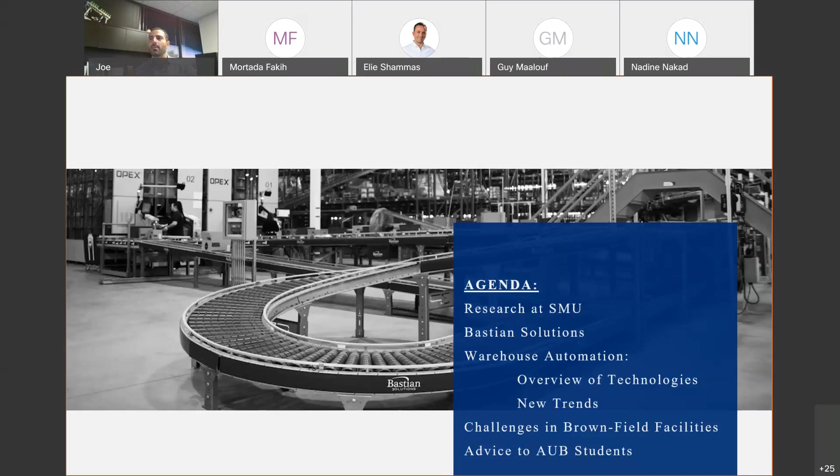All right, SMU. I went to SMU, I did research in robotics, and the motivation behind that research was to explore robotic locomotors that are not necessarily inspired by nature. This is a family tree of dynamical systems that can represent a general scheme for locomotion.

You start with a simple mass, then you add more masses and linkages and revolute joints, and you get different generations of dynamical systems. And it was shown that each generation inherits the locomotion gaits of its previous ancestors and creates its own new ones.

Out of these systems, you can identify here, let me put a laser pointer, a bipedal locomotor. This is how humans walk, they get a stable gait, and this is how they do the walking gait. But you also can see worm-like robots and systems. Really, the focus of my work was on investigating creating a system that can regenerate gaits, and for that first generation here is what I call a baton.

So let's talk a little bit about gait. Well, if you get a mass here with a surface, and you throw it at a certain velocity and initial condition, it'll bounce and eventually die out. But if you put it on a decline, or if you give it a little more energy at every impact and compensate for the losses there, it will get to a stable gait, and that would be a bouncing gait.

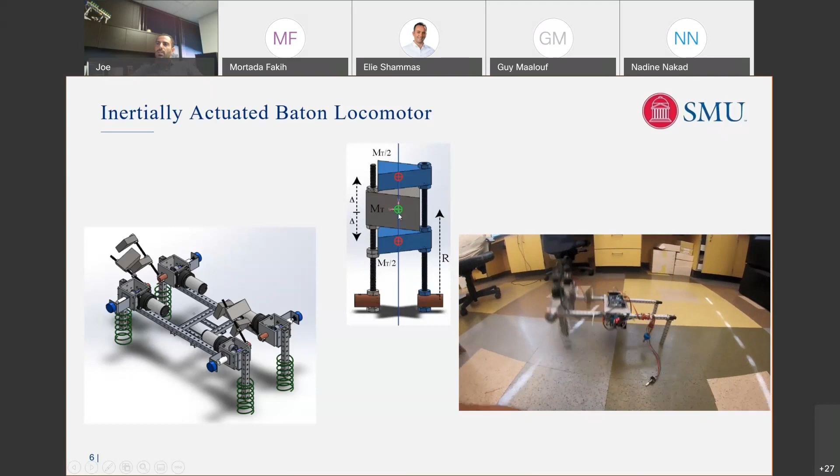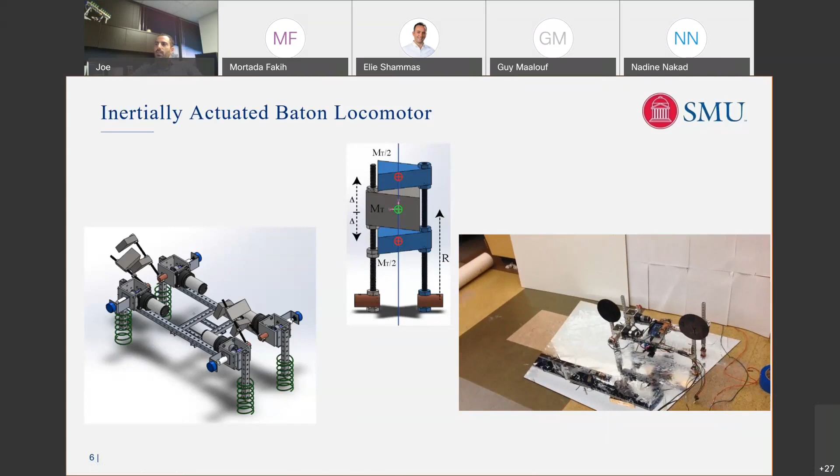And here you see masses. The way we did these, I did these masses, you've got to have a balanced system. So with these triangular masses, I was able to put the center of mass in the sagittal plane of the robot and keep it stable. This is an onboard video. This is bringing back a lot of good memories, but these robots are not even close to what we do right now.

I'll show a couple more gaits here. This is a galloping gait where you have actuation on both sides of the baton, and you can see here in slow motion on the robot. And changing some other parameters, such as the rendezvous angle, you get a hopping gait.

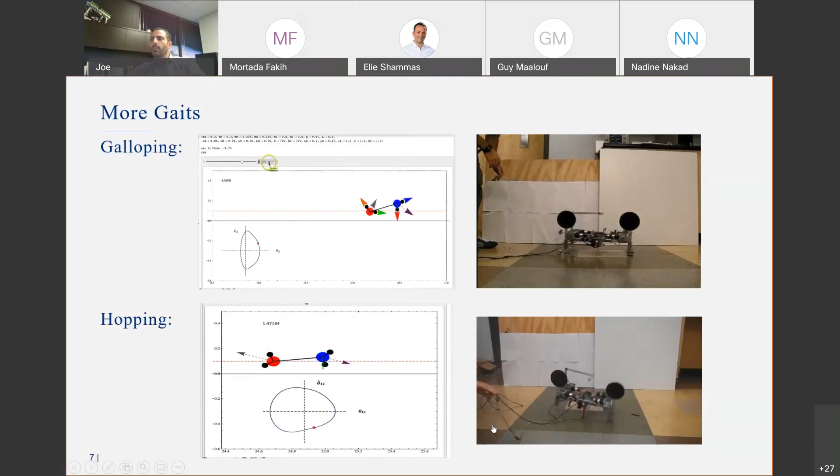Very cool work, very close to what I do here in motion planning also. And I'm glad to see that you used to use Mathematica back there. Yeah, okay, very cool. Are you guys using it?

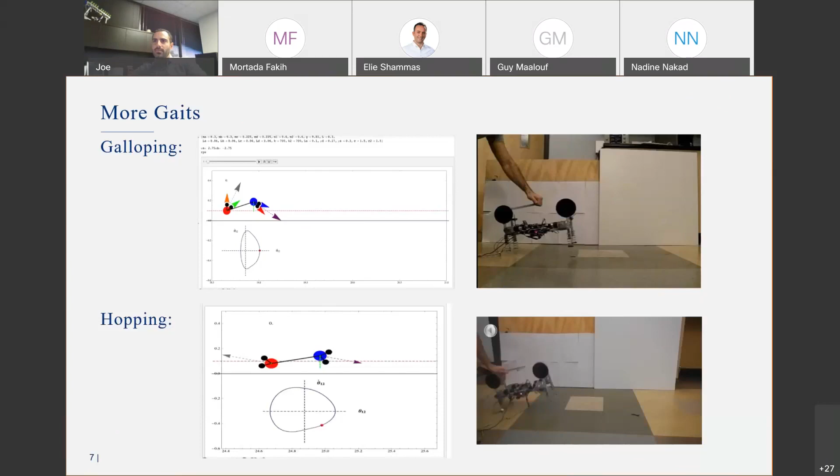Yeah, maybe a quick question, Joe. So I see in your phase plots, it was theta versus theta dot, or maybe I missed something over there. Sorry, can you say that again? In your phase plots, if you go back one slide. Yes. One more, theta dot.

Well, to explain, theta 1, 2 and theta dot 1, 2, that's the angle of the baton with respect to ground. It really shows you, for example, on these larger phase plots, that you're on a limit cycle with a certain level of theta dot. And it tells you if you're tapping or dragging in the case of the smaller ones. You look at bifurcations, coexisting limit cycles, etc.

But really, these phase plots don't give you necessarily a velocity profile of the gait, and this plot here shows it. You've got the average velocity of the baton with respect to the rendezvous angle beta, and you see how it moves forward in certain scenarios. It goes negative in the negative direction, and it can be going negative direction and also tapping forward—so dragging backward and tapping forward.

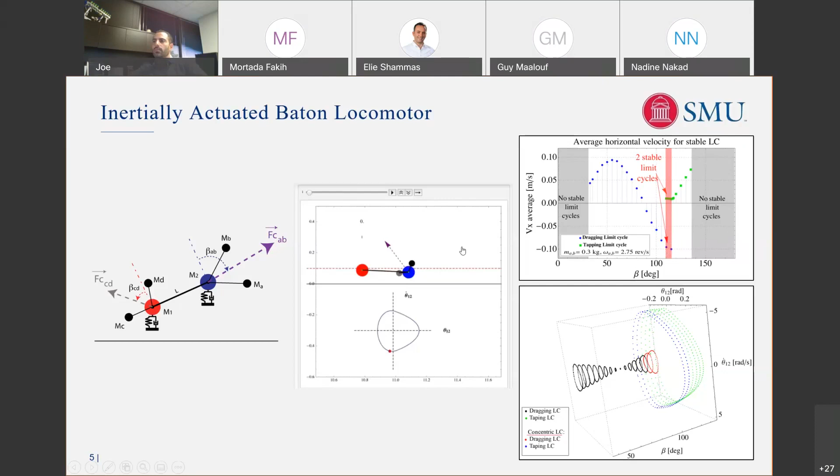Alright, let's talk about Bastian Solutions. We are a system integrator. We work in the warehouse automation industry for the material handling businesses. We've got over 900 employees, closer to 1,000, and half of which are engineers.

We work with a large amount of suppliers, we partner up with them, and we've got a big customer base in the US and internationally with Fortune 10, Fortune 100, Fortune 500 companies. We are number 15 worldwide in material handling system suppliers, and number 3 in the US.

We've got offices around the country here in the US, and a national presence. I'm part of the mobile robotics office in Dallas, Texas, where we develop mobile platforms, mobile robotics, R&D projects, all of that.

About 3 years ago, a little less than that, we got acquired by Toyota, the Toyota industrial side of the business, not the motor side. Motor side is like a relative in the family. We have basically solutions for every challenge in the warehouse automation and material handling industry, and we've got presence everywhere.

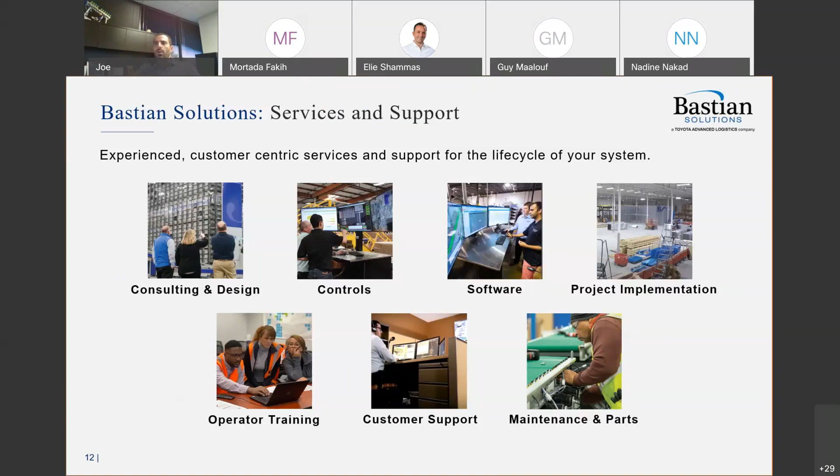We do project implementation from A to Z. So we can buy equipment, design and manufacture equipment, install it at customer sites, commission it and get it going. Then we do training for the operators, customer support 24/7, and of course maintenance and parts.

Now, here is a brief overview of the applied technologies that we can integrate. We are a system integrator, so we find the best solution for the customer, the best of breed for every unique solution. So if we're installing a piece of conveyor, we have our own conveyors, but we also partner up with suppliers of different conveyors depending on the customer's application and needs, and we would recommend the right fit for them.

I'll be going into more details on the technologies I've highlighted here, but we do everything from picking technologies, ASRS which is automated storage retrieval systems, goods-to-person technologies, retail and e-commerce, AGVs which are automated guided vehicles that navigate in warehouses. We do a lot of robotics, different applications which I'll briefly highlight later, and goods-to-robot, I'll get to that later. I want to bring up that we do a lot of custom automation—really one-off projects, one-off automation systems, material handling systems. We've got a group focused on that, a very smart group of engineers. And obviously we do conveyors, sortation systems, racks and shelving as well, but I'm not talking about them today.

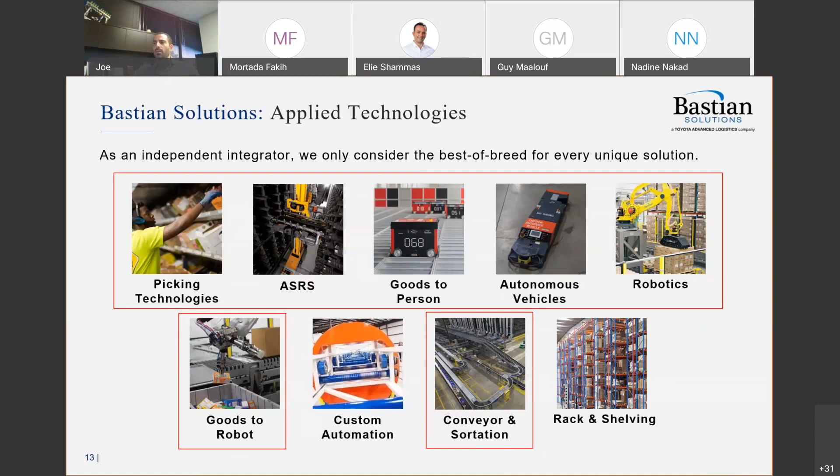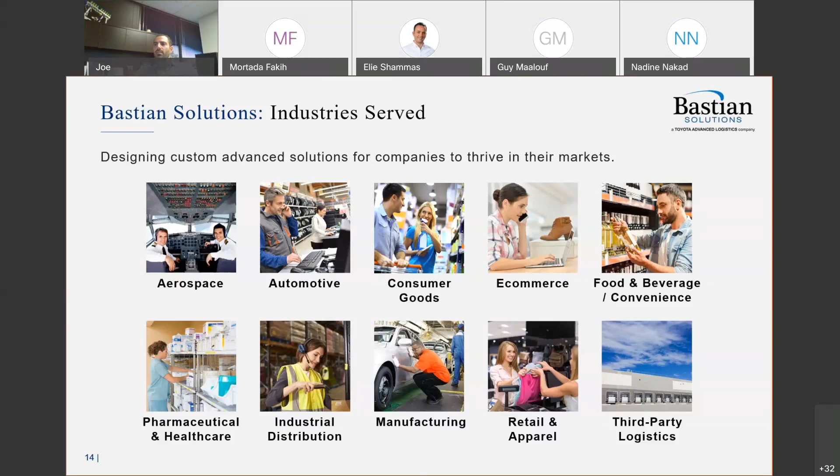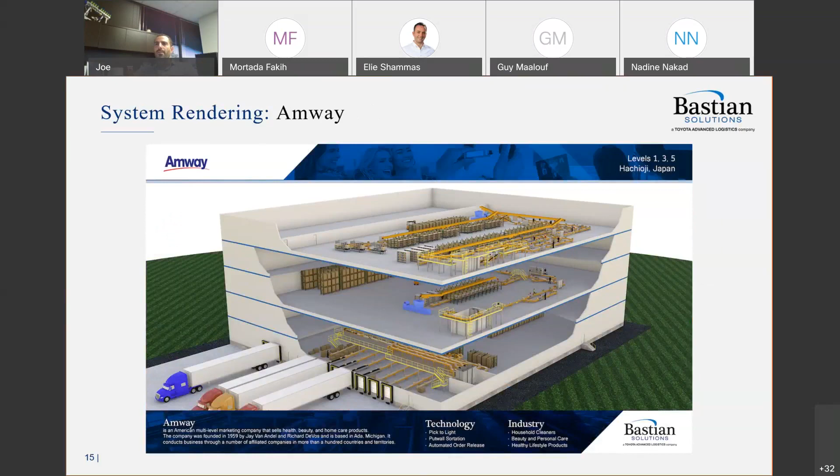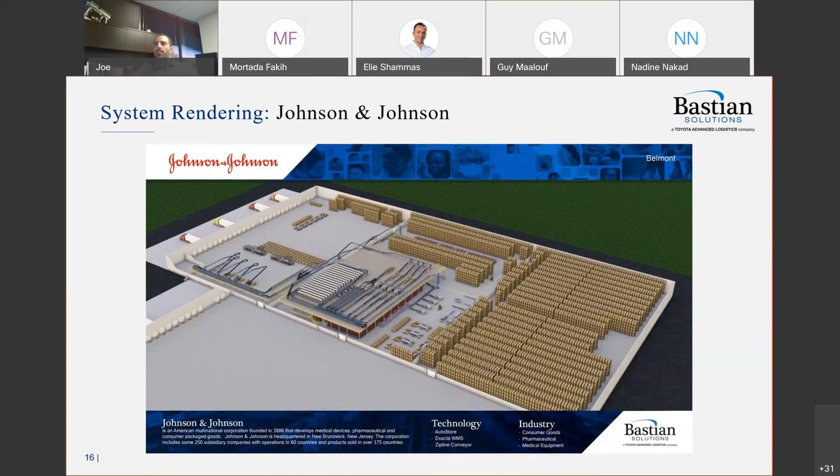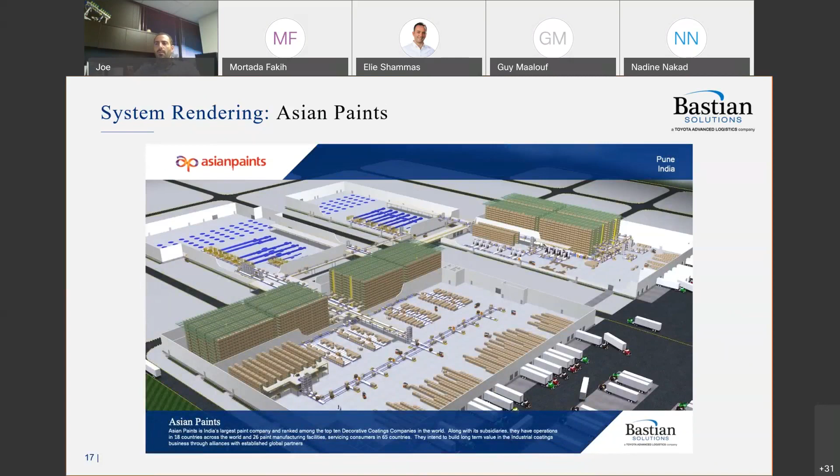I'm going to show briefly a couple of these renderings of projects we've implemented at different customer sites. I think this is Amway in Japan. This is Johnson & Johnson, which has been very well in the news recently since they're working on COVID-19 vaccines. And this is Asian Paints, one of the largest paint companies in India. That gives you a scale of what we do.

All right, let's dive into warehouse automation technologies. But before I do that, let's see why we would use automation.

Well, first, obviously, you want to bring the cost down. There are different ways you can optimize for cost with automation, but really the major challenge is labor. The labor force is declining and wages are increasing.

In general, the jobs you're trying to fill for warehouses are high turnover jobs. People don't last in them for long, maybe a few months, a year at most, and then they quit. So it's a very challenging HR problem for companies to keep people, especially with seasonal demands. Around Christmas time or other holidays, some companies need to hire a lot more people to keep up with demand, but then they have to let them go. So that's a challenge, and automation is a solution to that.

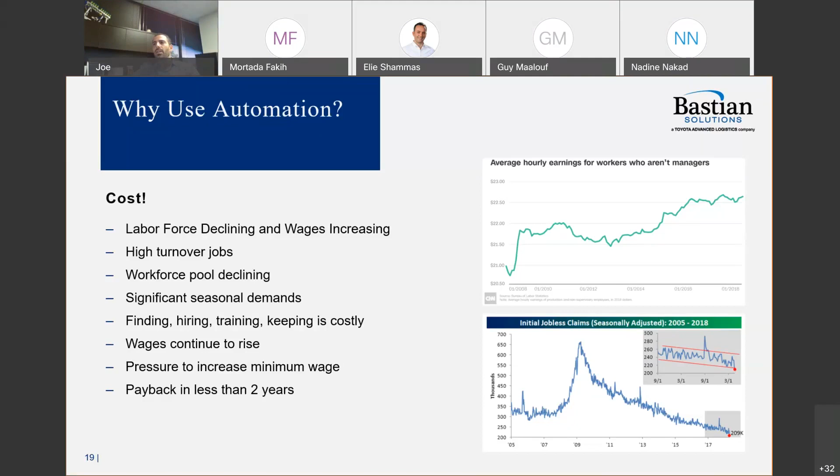And obviously, wages are increasing and continue to rise. A lot of times when you employ technologies and automation, people look for one to two years of payback, so a high ROI, so they can recapture their money and save on cost.

You also have danger around warehouses. Forklifts, for example, are the number one cause of death in a warehouse. So a lot of people are looking to automate forklifts in warehouses to prevent that.

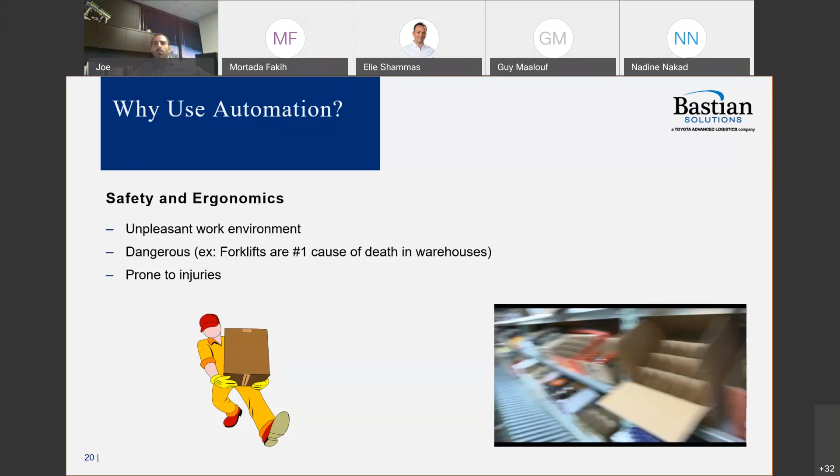Now, when you use robots, you improve productivity. Obviously you can scale - increase the number of robots, increase certain areas, repurpose it. It's very modular in general for shifting markets. So if you have AGVs, you can later add to the system. A couple of years down the road, if your production is increasing, you can add more robots, for example.

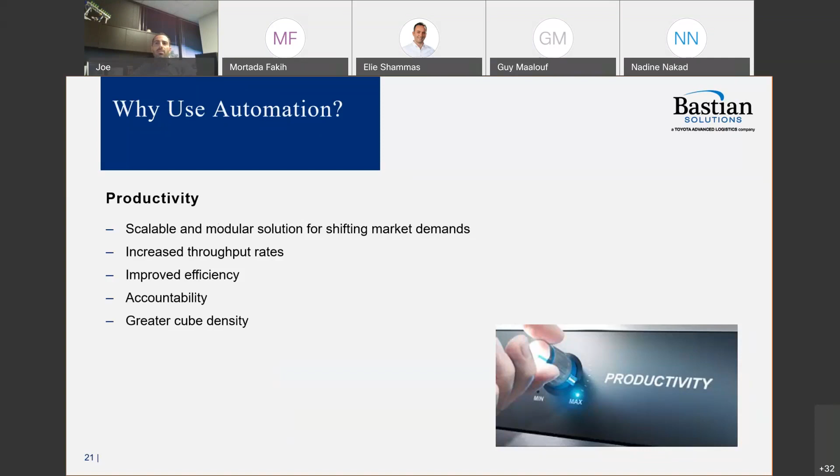You can have an increase in throughput rates, obviously improved efficiency, and you don't have mistakes in orders. Also accountability - in Lebanon, when I go and visit, I keep hearing about somebody going bankrupt because such and such stole from them, from the warehouse, this and that. If you have automation and the right systems, you can keep track of everything. And of course, you can leverage space much better - you can get a greater cube density if you go vertical, which I'll touch on later.

One of the disruptive technologies that affected our world is the Amazon effect, with same day, next day shipping. All that put a lot of stress on other companies to survive. They needed to add automation.

Finally, let me move on and talk a little bit about social distancing. As you all know, we all had to go work from home, but we still want to eat, we still want medication, we still want everything delivered to us. And how do you do that? Well, some of these companies are having to rely more and more on automation.

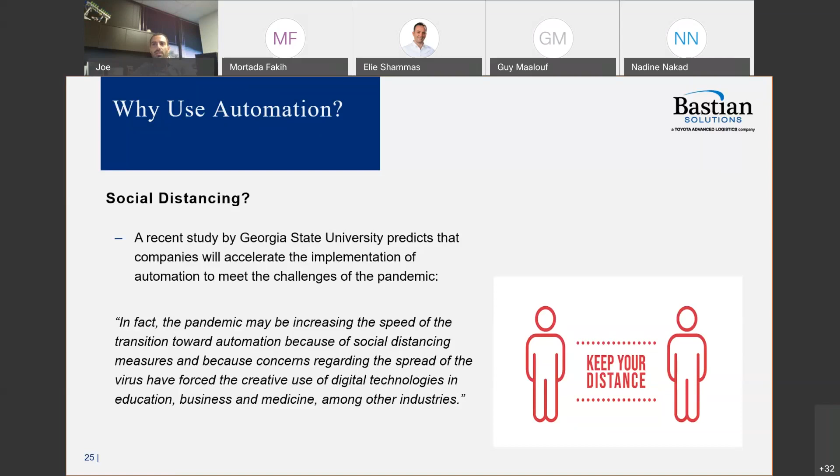I was looking at an article before this presentation by Georgia State University that predicts companies will accelerate the implementation of automation to meet the challenges of the pandemic. And we know that firsthand from our customers as well.

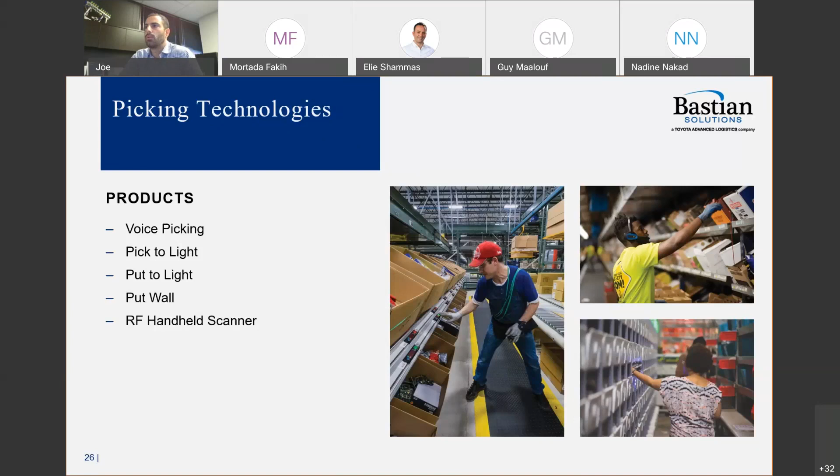All right, let's move on to picking technologies. This is where we start talking about the technologies and overview of warehouse automation, but this is a standard way to fill orders - voice picking or pick-to-light systems. You've got associates picking items from different shelves, filling orders, running around the warehouse. This is not automation, but it gives us a good idea of how things operate.

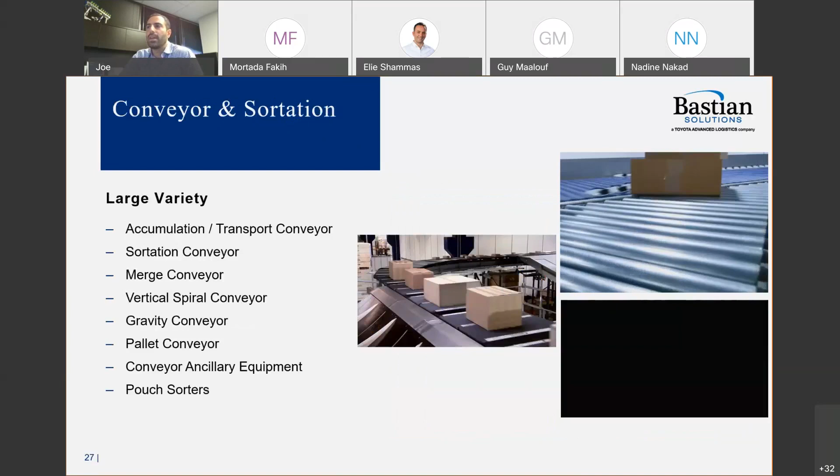Some of the conventional automation systems are conveyors and sortation systems, and you see them here. These are some of the products we offer.

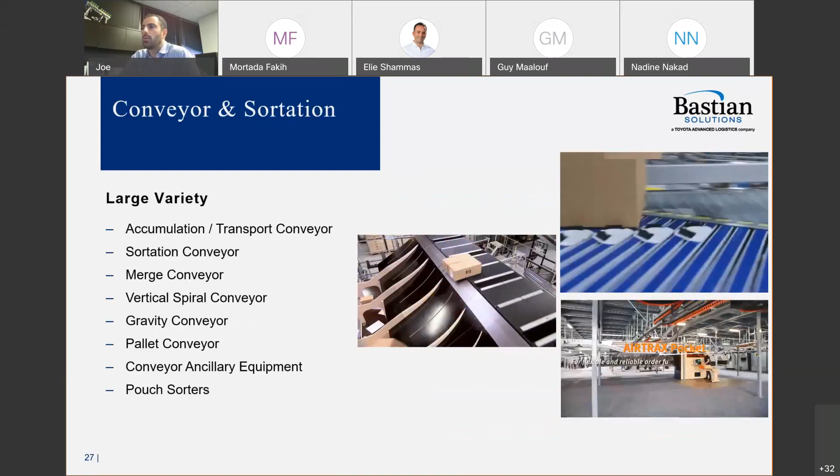Vanderlande, which is our counterpart in Europe, same family within Toyota. This is one of their recent offerings. It's a pouch system where you can store items, and it goes into vertical space to store them.

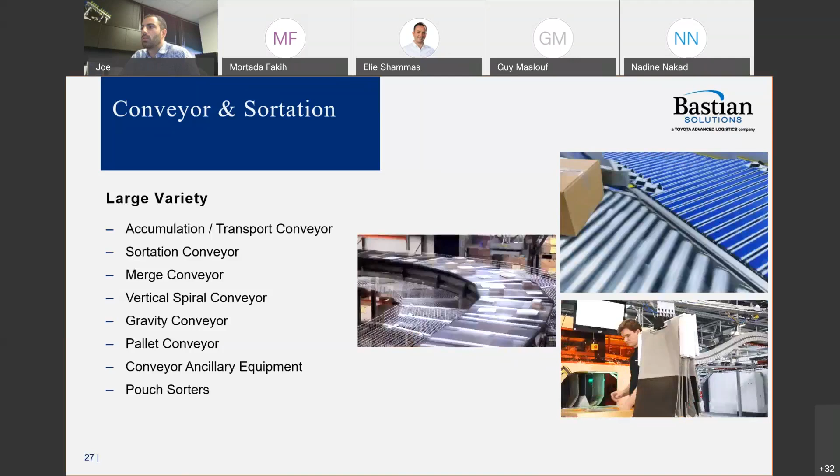Next up, I'll talk about ASRS, automated storage and retrieval systems. I'm sure you've seen something similar, like vertical car parking. These are very similar. I remember the first time I saw one in a warehouse, I spent three to four hours just watching it run - that's amazing. You've got a crane that goes up about 40 meters in the air, picking up pallets that are a couple tons in weight. These are great for storing pallets in a warehouse or distribution center, especially for refrigerated or freezer applications.

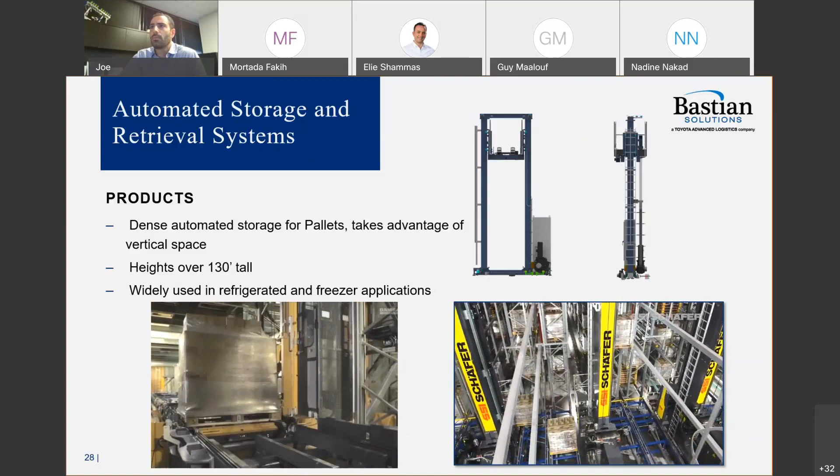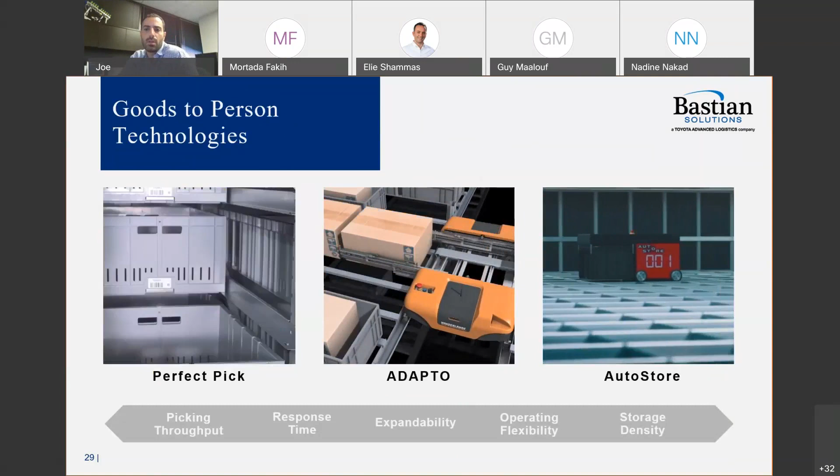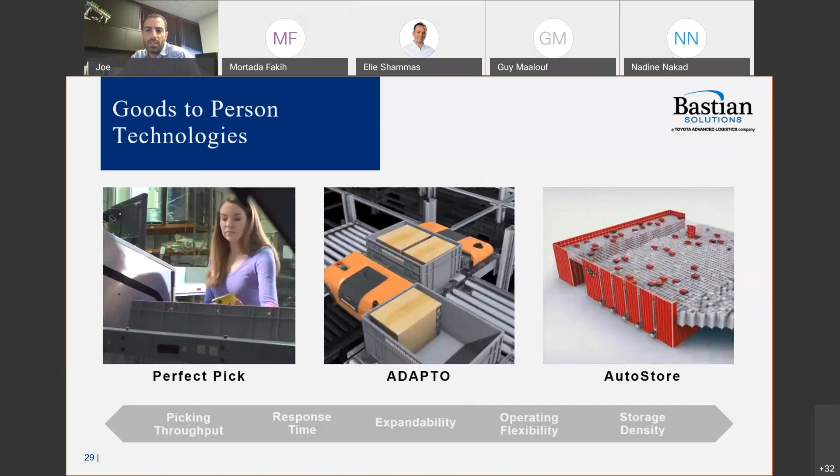Another type of storage system is goods-to-person shuttle systems. It's a modern method for order fulfillment, where the product is moved directly to the operator, who can pick what is needed to fill the order, allowing for an increase in efficiency and accuracy of the picking process. It is ideal for ergonomic picking, easily scalable, and offers a dense storage footprint.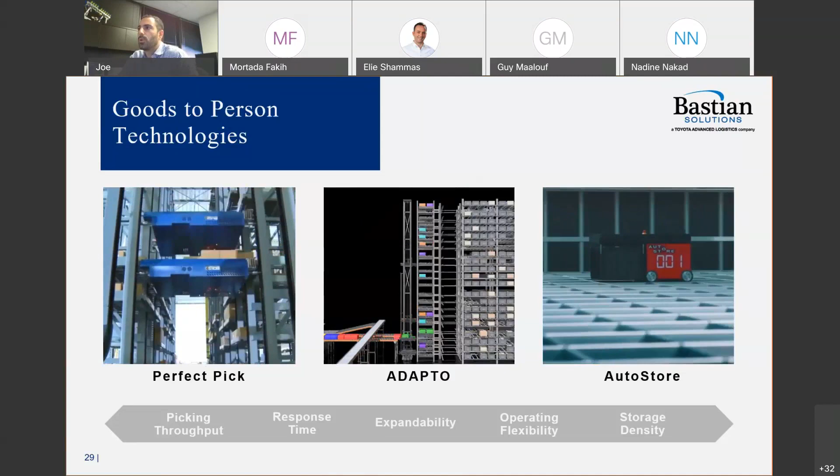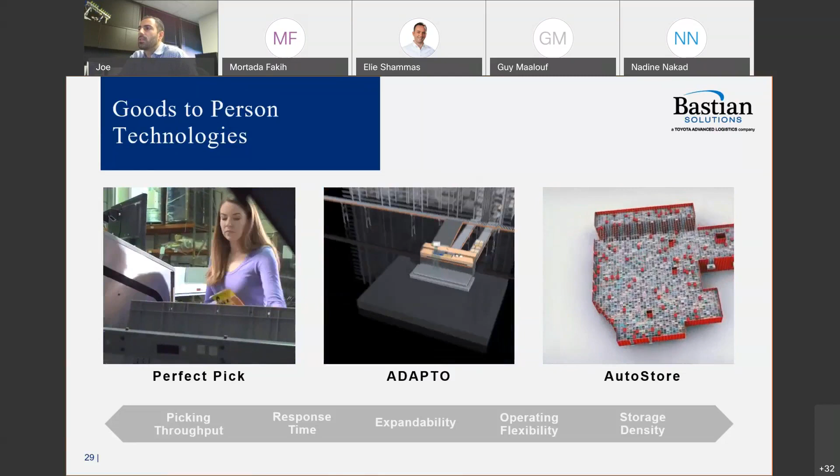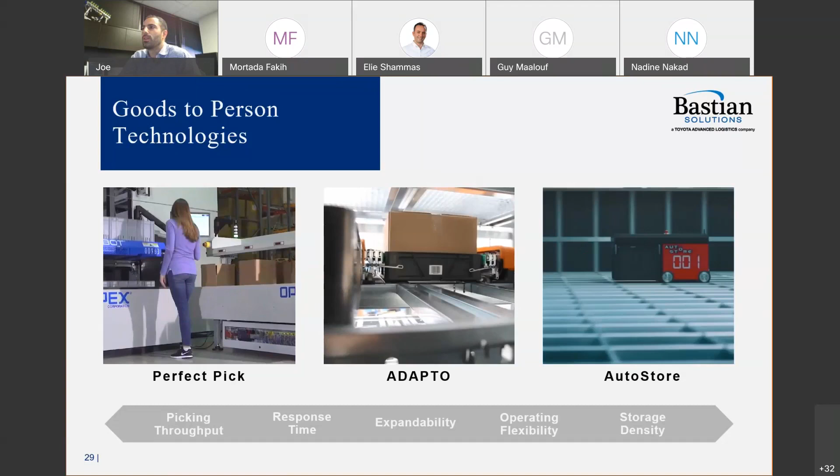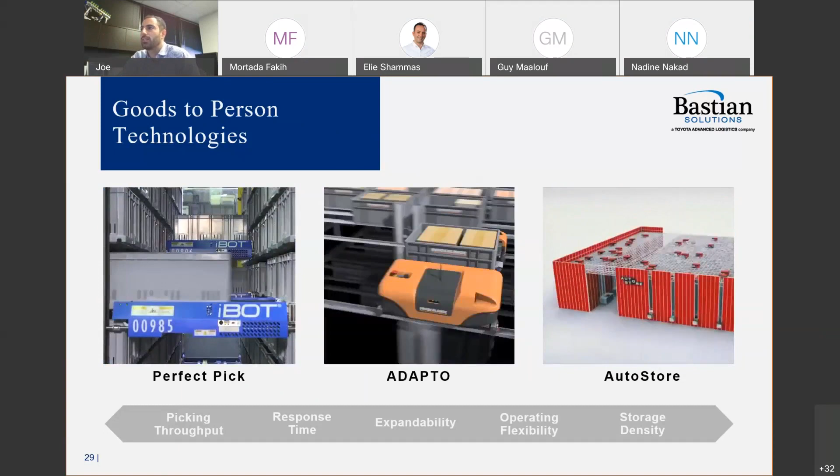The one on the right is the AutoStore. I'm going to show you a rendering at Puma in a bit of how this system is operating, but it's pretty neat. You get the high velocity or high frequency items stored on the top layers of that grid, and the low velocity ones on the bottom. So if it's a retail customer, in summertime they've got certain t-shirts on the top side, and later in wintertime, you get the jackets and heavier clothing on top.

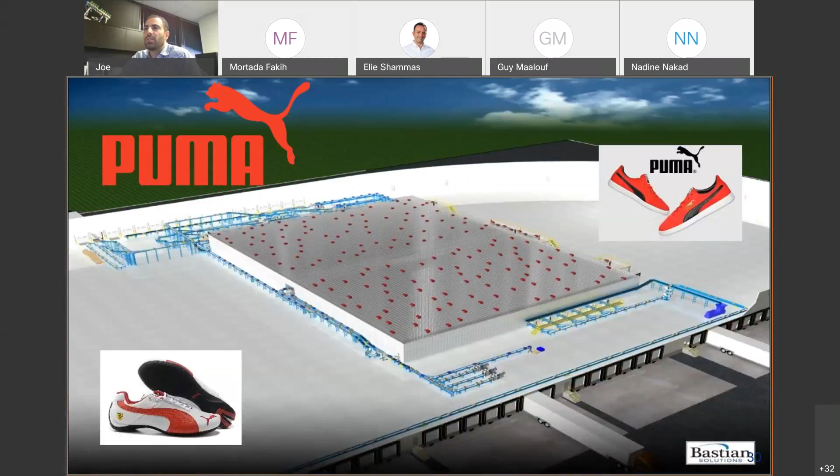So that's a Puma rendering, one of our customers, where we've integrated this AutoStore technology.

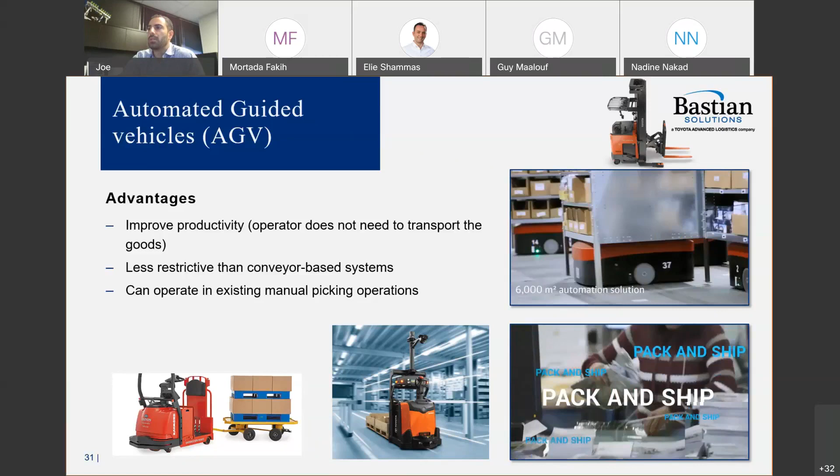Next, we move up to AGVs, automated guided vehicles. There are many different types in warehouses currently. Some of them are tuggers, so they pull carts. Some of them pick up pallets and move around. And there are different types too, where they pick up shelves, like the Amazon Kiva - it picks up a shelf and takes it to an operator where they pick items from the shelves and fill the order. The last one, bottom right, is a mobile platform that follows the operator so they don't have to carry bins around the warehouse.

Sorry, Nabil, I don't know why you want to annotate. Please let me know if you have any questions. No, thank you, that was a mistake. No problem, I figured.

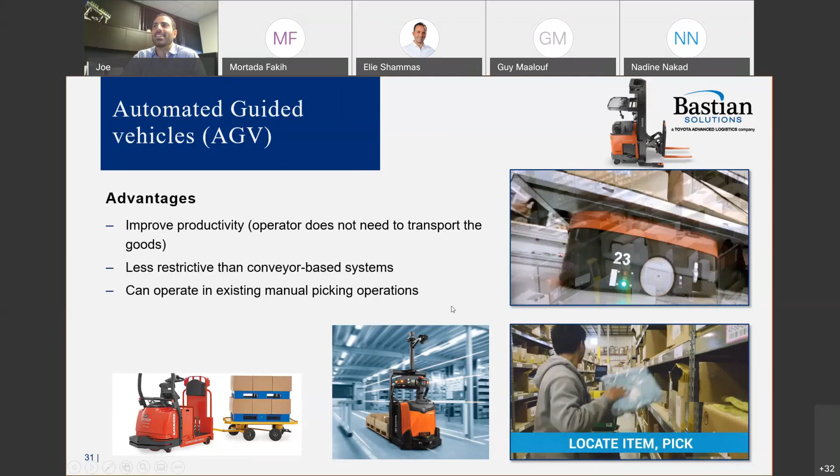All right, there's a wide use of robotics in the warehouse industry. It really is getting more and more advanced with the development of new types of end-of-arm tools that are very intricate, able to pick different items of different shapes. Also, due to sensing technologies, lasers, camera vision and all that, this is enabling this type of application and system in the warehouse.

All right, so these were the basic commodities and general technologies used in the warehouse automation industry. I'm going to talk now about new trends and emerging technologies - those being developed or used.

First one is goods-to-robot technologies. So we looked at each-picking and pick-to-light systems, where the person goes to the goods to pick the items. We also looked at a goods-to-person shuttle system, where it brings the tray to the operator to pick the items. But what if you were to have a robot there?

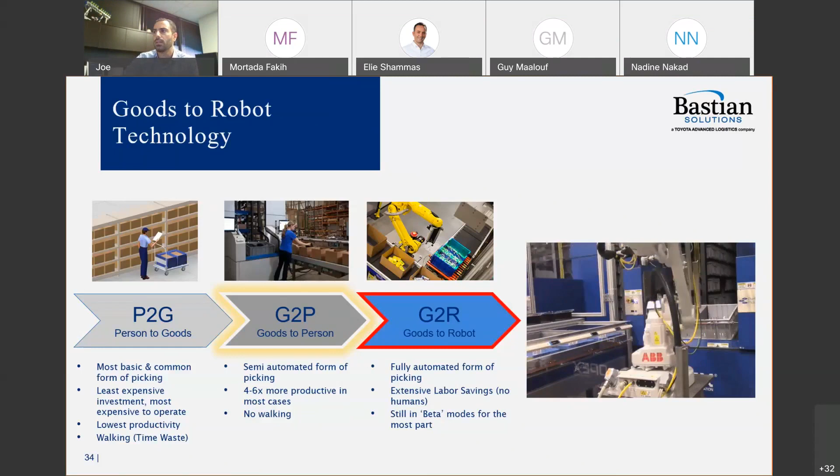And this is where you bring the goods to the robot and get it picking, which will save in labor costs. But these systems are still mostly in beta phases. They're not widely available because of the variety of items they need to pick. It's massive, thousands and thousands of stock keeping units that automation is not there yet, so it's all work in progress.

Another type of technology is the robot-to-goods technology, and this is where myself and my team are involved. This is where you get the robot to go to shelves or to the product to fill the orders. That's another way to improve productivity.

It is less restrictive than conveyor-based systems because you can definitely scale it, and you don't have to have conveyors that are always there. You can remove the conveyors and have these mobile platforms go everywhere in the warehouse. You can also put them in brownfield facilities or existing manual picking aisles, and I'll show you some videos later on.

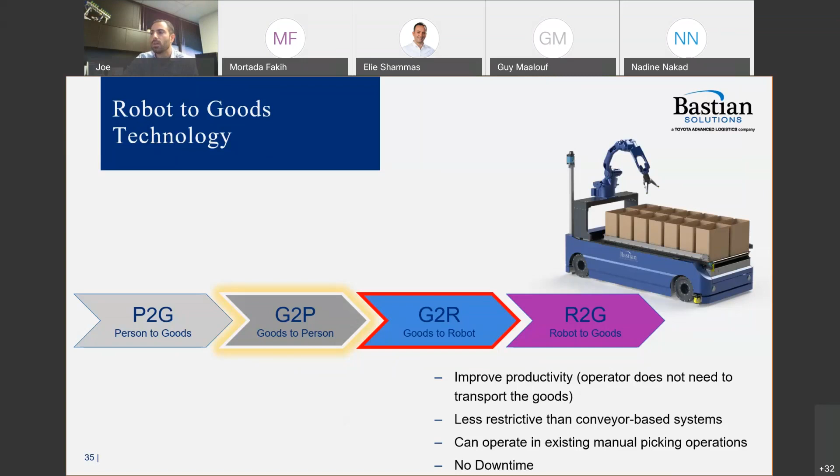So really what we've done at Bastian when I first joined is create a concept for each picking or batch picking. It's a mobile robot that drives in aisles and picks items from shelves and fills the orders on board the robot. We did simulations to figure out how many orders we can put in a robot, or should put in a robot. That depends, of course, on the customer, products, the customer's orders, the order profile, and the throughput rates. You can optimize for that.

Here you see the robot. It's got about 16 bins on board, and that means it's filling 16 orders at a time.

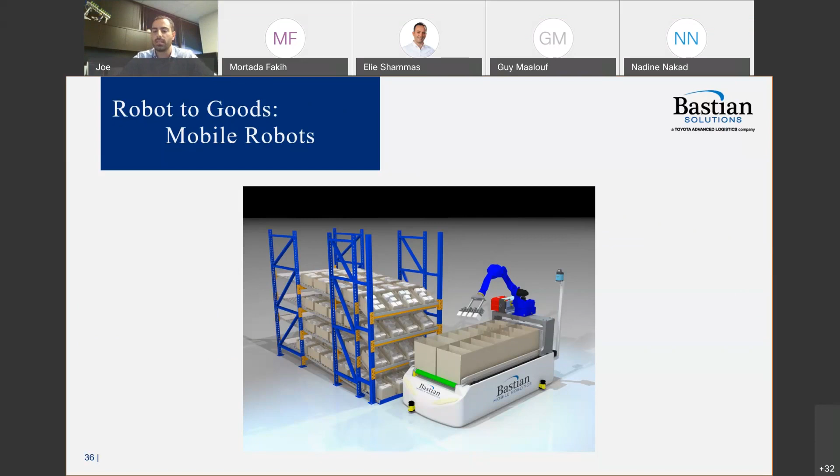Let me talk a little bit more about the technology we use on this mobile platform. First, you've got an industrial arm. It's an industrial 6-axis robot with a reconfigurable or custom end-of-arm tool to pick different items for different customers. It sits on a gantry, which is like a bridge that allows it to traverse along the length of the platform to reach into the totes or bins in the front.

It uses a mobile platform with omnidirectional, wheel-based movement. These are Mecanum wheels. I don't know if you guys are familiar with those, but you'll see the videos later on. We also use scanners and LiDAR for navigation purposes.

We also use opportunity charging. This is a way that we can allow the robot to operate 24/7. We employed wireless charging technique, inductive charging, similar to how you can charge your phone on a pad. But instead of charging batteries, we charge ultracapacitors. You can quickly charge those capacitors and rely on their high power density to provide power to the system. So when the robot is driving in an aisle, it can be charging. If it goes from one aisle to the other, it can rely on the capacitors to navigate.

One feature I'd like to talk about, and I hope you guys are familiar with it, is ROS Industrial, Robot Operating System. This is an open source platform for robotics. Are you guys using ROS? Anyone doing research or work with ROS?

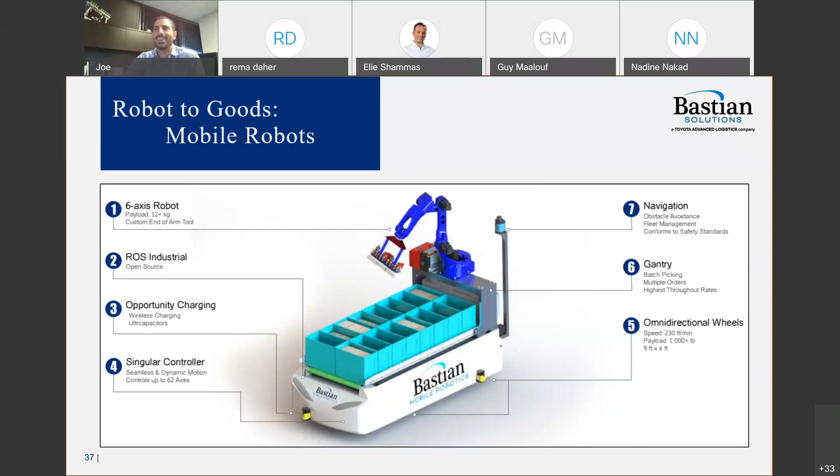All right, so what we do is also create simulations to figure out how many robots we need, how fast we need to drive the robots. This is how we design systems. We go back and forth between different iterations of the prototype and the simulation.

And here you see robots working together to fill orders. They're picking items from shelves and dropping them off at drop-off stations. When the bins are empty, we put the empty bins on a trash conveyor or a return conveyor. We put it far back in the simulation, but it's actually right on top of the robot.

We launched the concept at trade shows.

Question: in the simulation, is this a full physics simulation or just a logistical simulation? This one is a logistics simulation, not an emulation. We do emulation for navigation systems, when we navigate with the model of the robot, or if we create other things, we use Gazebo, for example, as a physics engine. But this is more of a logistics simulation. It's called FlexSim, and it's a very robust tool for different applications, but it's pretty neat for our supply chain and warehouse simulation.

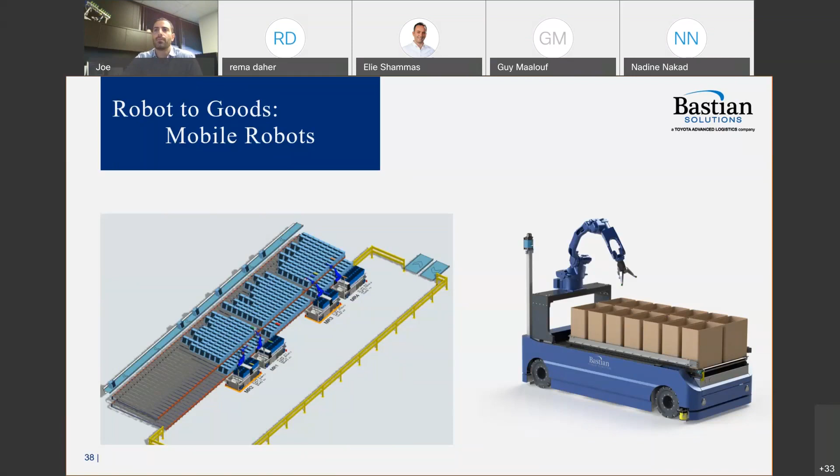Okay, thanks. So here we launched the robot. This is at ProMat 2017. We put a small setup—it's a demo setup, of course, made it easier for us to do a show, but obviously we've put these at customer sites, and they look a lot faster in real life and a lot meaner.

So here you see the robot can crab sideways. We put omnidirectional wheels so we can navigate tight aisles. And you can see also here replenishment.

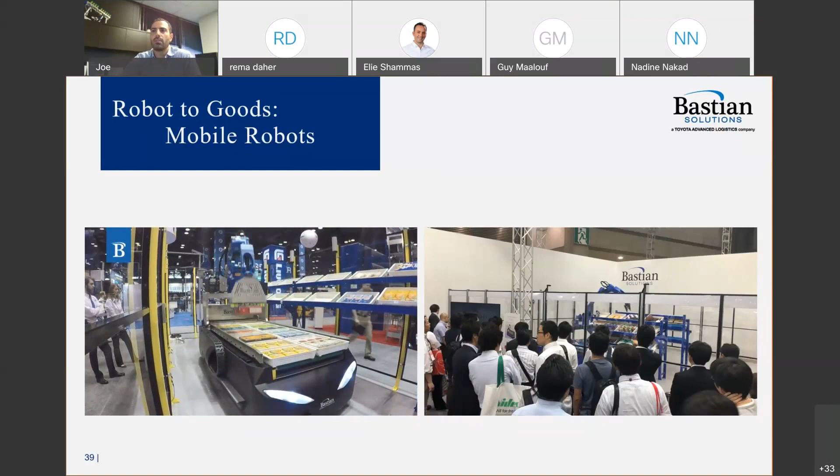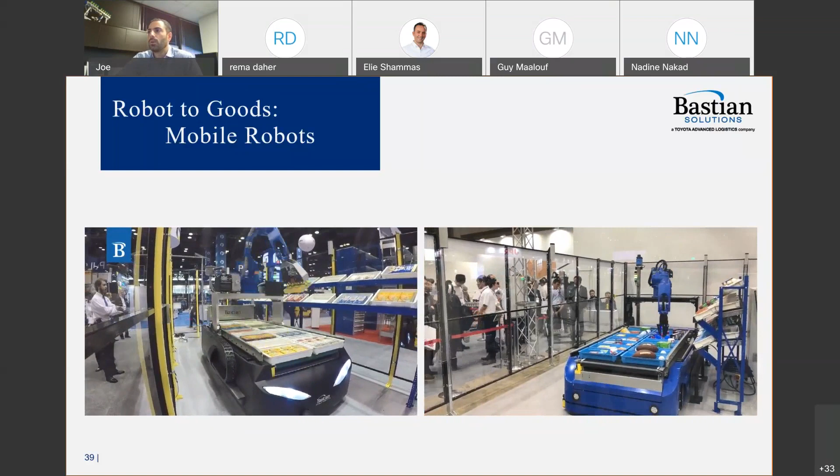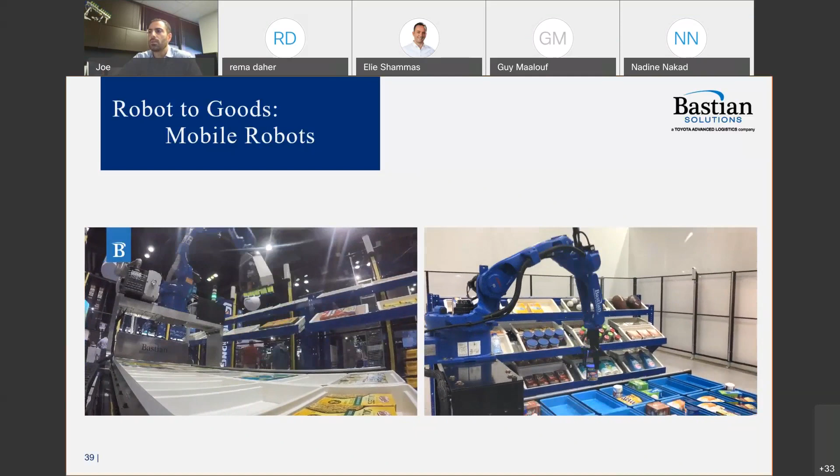We put another generation at another trade show. This is Logis-Tech in Tokyo. That was the second generation of the robot, and we put a special end effector tool that we've developed. It's a 3D printed end effector tool that's got 3 fingers. You can grasp with it, and you can also use vacuum cups on the tips to pick items. So depending on the item shape, you can pick it differently.

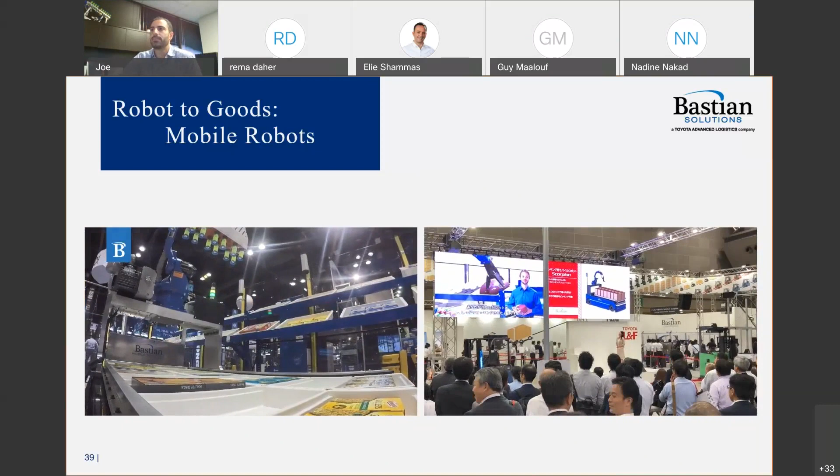Another type of robot to goods application is the Ultra robot that my team and I have been working on. This is a robot specific to applications where it's a very challenging environment for operators to work with, and that is the loading and unloading of trucks at the docks. Operators can be picking up items up to 50 pounds or 20 kilos and lifting them up high. It's very stressful for the shoulders, the back. It also is a very hot or very cold environment, so it's very unpleasant. A lot of people try to automate this process by putting a robotic arm in there.

But the problem with these robots is they're not designed to be in a confined space, so what they have to compromise with is speed. They have to slow down the robot to maneuver around singularity and obstacles. So what we did is we designed a platform—it's a mobile platform also, but it's really designed from the ground up for this application.

The concept is it's a mobile platform, a robotic conveyor, and it drives into the truck. In this case, it's unloading. It's got a telescoping conveyor attached to it that follows it into the truck, and it goes to where the product is and it picks it. It can also do loading as well.

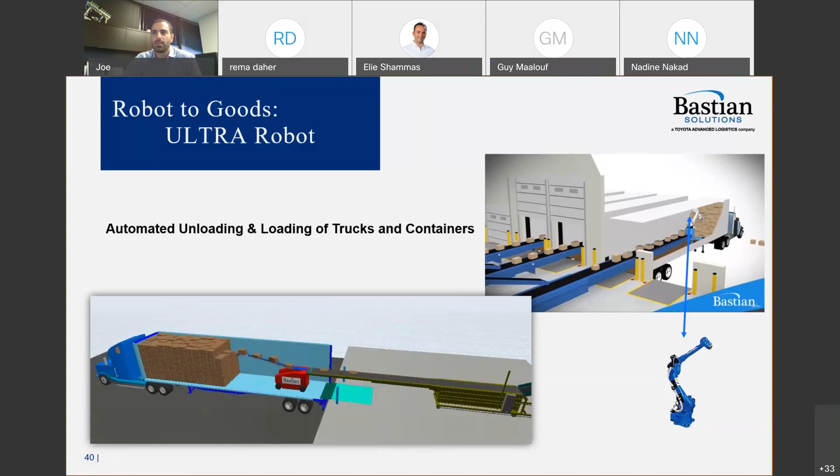So we did a simulation with FlexSim also to look at what type of speeds we need to design accordingly and meet the throughput rates that would be required to justify the cost of this technology. And we built prototypes—this is our beta prototype that we have put in the field. We've got several of these robots in customer sites.

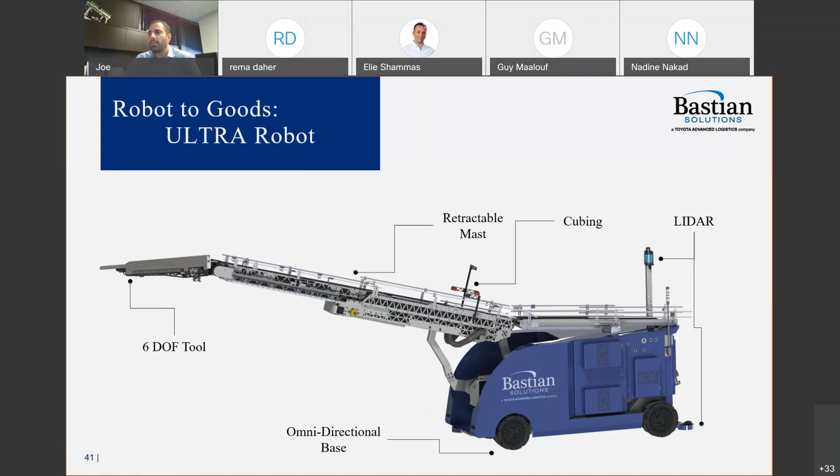It really is, again, a robotic conveyor. It's got an end effector tool with 6 degrees of freedom. It does have an omnidirectional wheelbase as well. We've got a retractable mast on board, so we can extend and retract, and we can park the robot if you've got confined space in the warehouse area. We also use cubing techniques to scan products in or out, as well as LiDAR and navigation to drive in and out of the trucks.

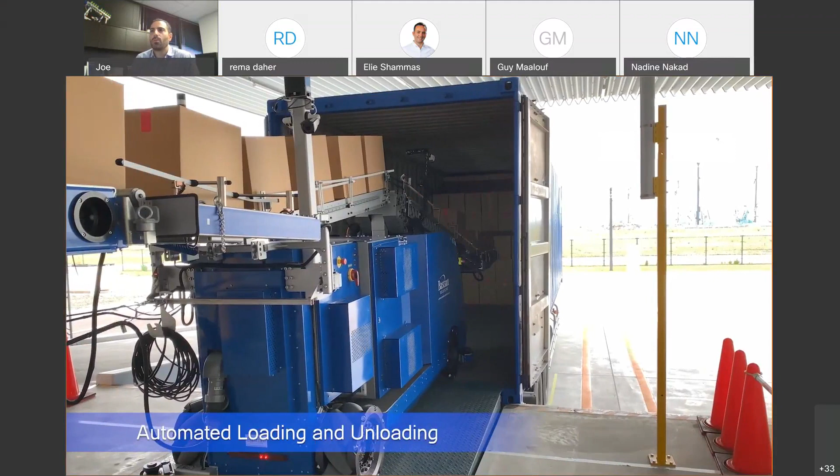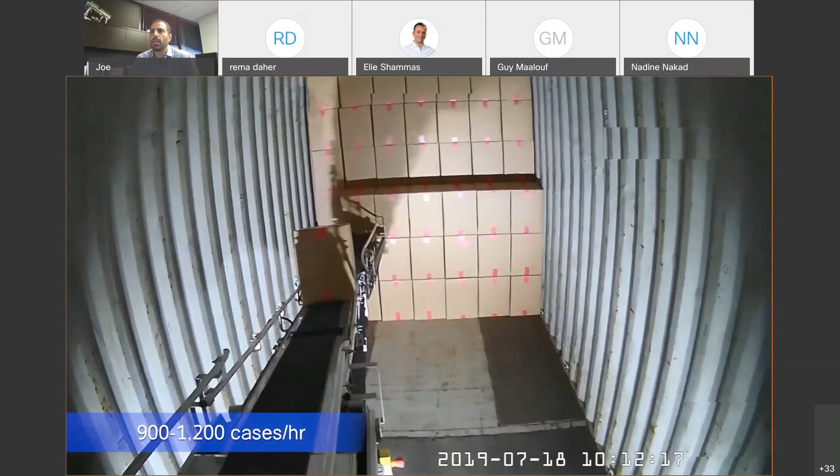I show a video here of one of our robots in the field. This is loading shipping containers. You see this from the back side, it's got the telescoping conveyor, and this is a loading application. The robot is loading in a serpentine fashion in rows of boxes, and we can load boxes in basically columns as well. What it does, you place boxes, you justify the box so you can clear up space at the end so you can squeeze another box in. And here you see it driving back on a dock leveler.

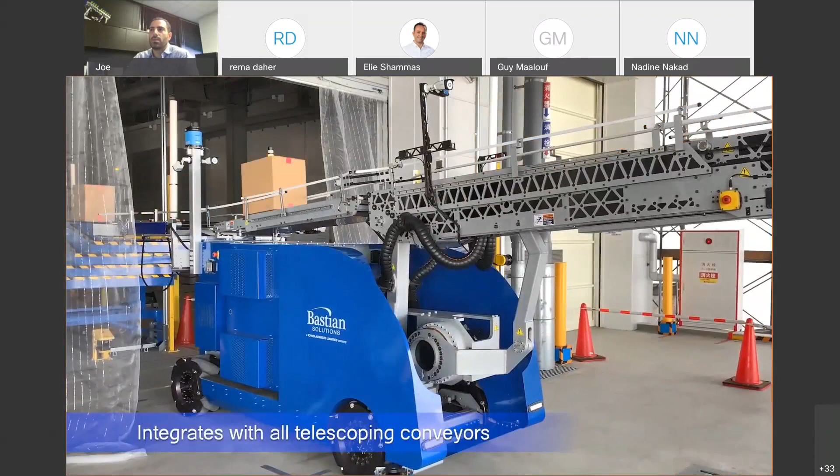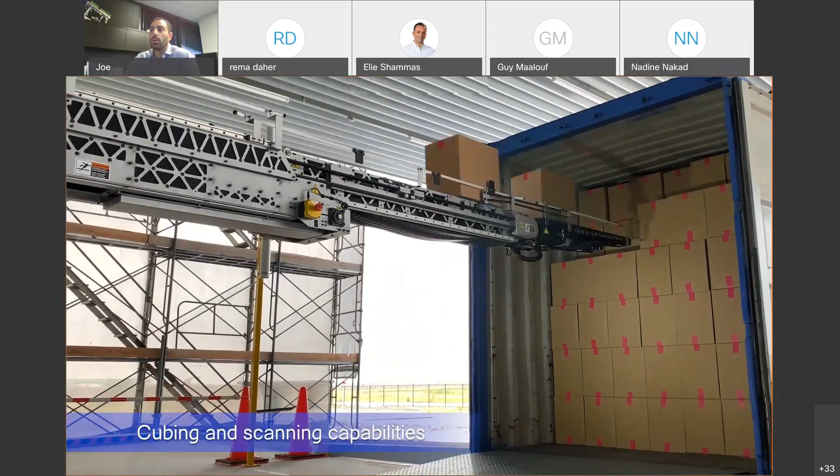More views. It's designed to handle boxes up to 50 pounds. Now, obviously, it does not do well if you have boxes of different sizes or if they vary quite a lot in size, but we are working on it—it's on our roadmap to solve. Right now, we focus on applications where the product is semi-uniform to some extent.

Oh, you can also do the reverse. This is a setup we did at a show where the robot is unloading boxes. It does loading and unloading, and here in this video it's unloading boxes. We've developed our own vision to do this work, employing convolutional neural networks and AI to detect boxes, along with conventional computer vision techniques.

So what we've created is a cost-effective solution for loading and unloading trucks. Customers get their money back in a couple of years. It's a very reliable system, and you can easily recover from faults. If you have a bad case or the robot is stuck somewhere, you can easily recover from that scenario.

You can reduce turnover by moving associates to more important areas of the operation. You still need to have a supervisor for these robots. If you've got multiple of these robots in a warehouse, you still have to have someone trained. So you take the associate that was loading the truck, train them on the robot, and have them supervise with minimal intervention. They do have to prep the trucks, make sure the robot is in the right location, and run them.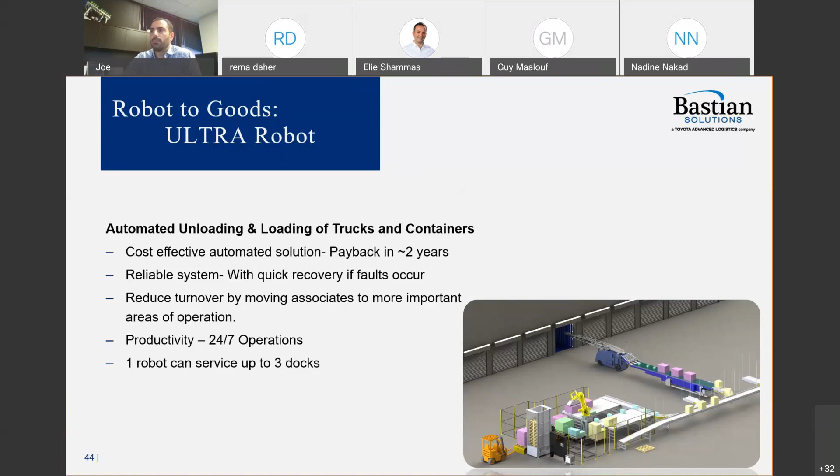I like to brag about the features of this robot because it was not easy to get there. Loading or unloading 1,200 cases per hour is not easy, and doing it at 99.8% reliability so you don't get many faults. Even if you get a fault, you can fix it in less than 3 minutes, with a mean time to repair. I like to brag about that. It's pretty impressive. I don't think anybody else in the world has been able to solve this. The attention we get every time we show this to customers or at trade shows, people love them.

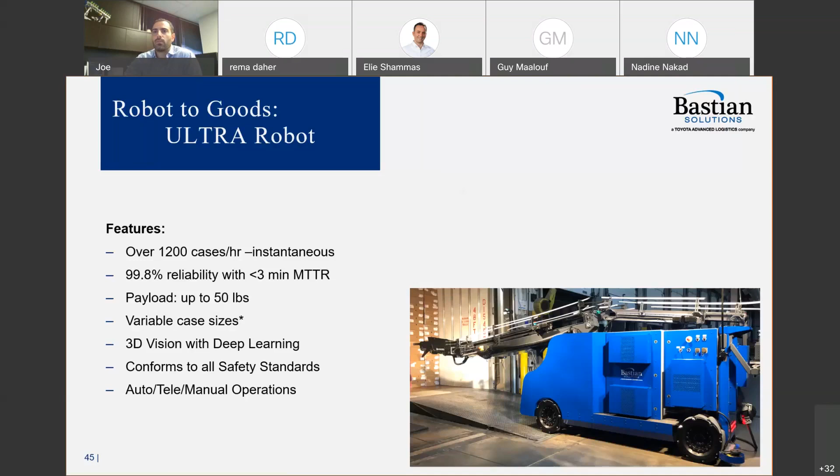One thing I would like to note here is we conform to all the safety standards in our industry.

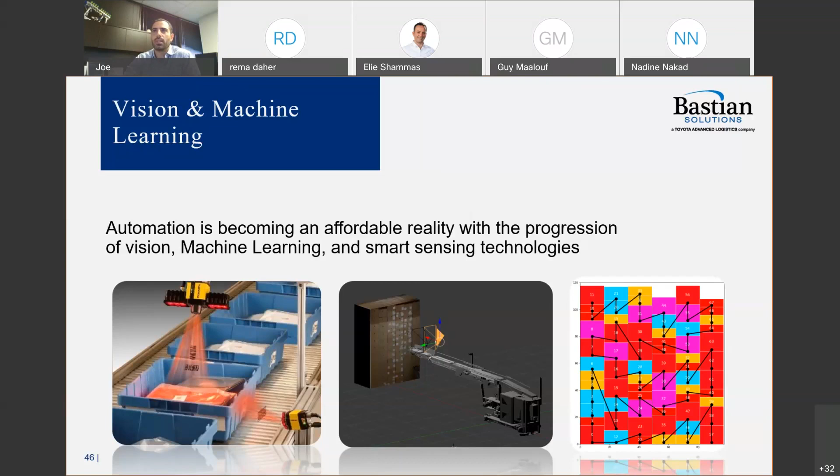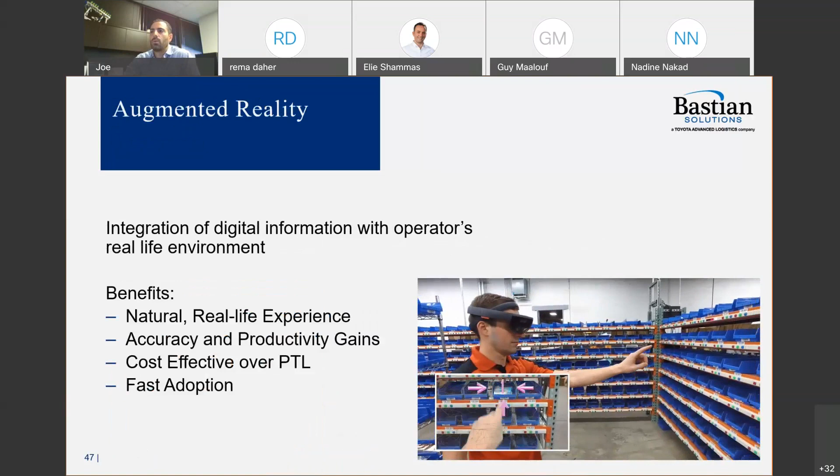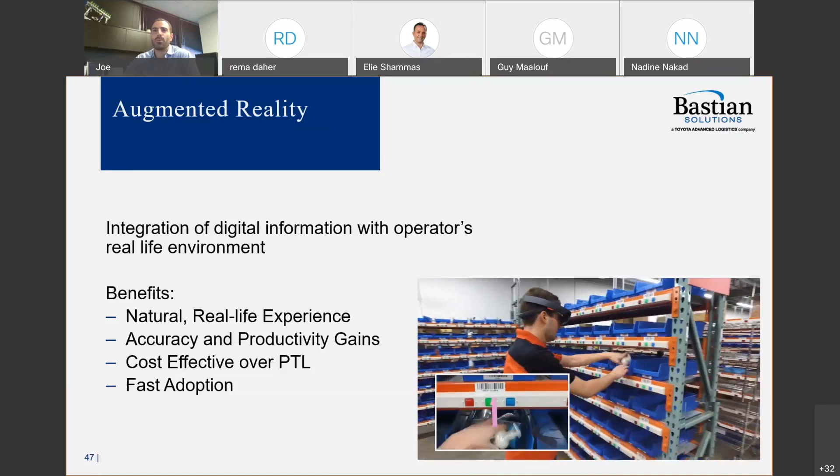I'm sure you've seen augmented reality. This is a HoloLens - we've got a software team that developed a way to do manual picking with that HoloLens. It points to where the shelves need to be picked from and how many items, and you can do an acknowledgement via voice or with a finger gesture. It's pretty, I've tried it. It's pretty cool and it's natural. You get used to it very quickly. It helps with accuracy and productivity, and you can get fast adoption as well.

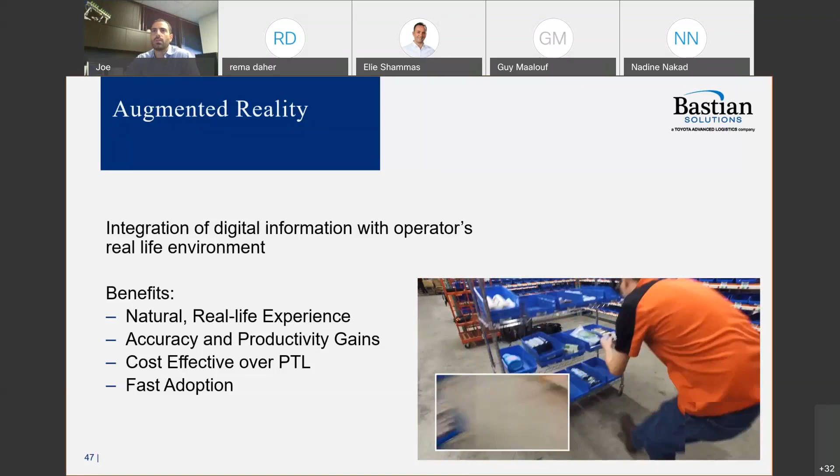A lot of AI is emerging right now in supply chain, whether it's for chatbots, operational procurement, or supply chain planning. You can forecast inventory through an AI system, optimize the delivery of goods, and plan logistics and shipping to get faster and more accurate results, reducing lead time and transportation expenses. Always working towards efficiency, cutting down cost. You can also do predictive analytics for supplier selection, supplier relationship management, and predictive analytics for maintenance.

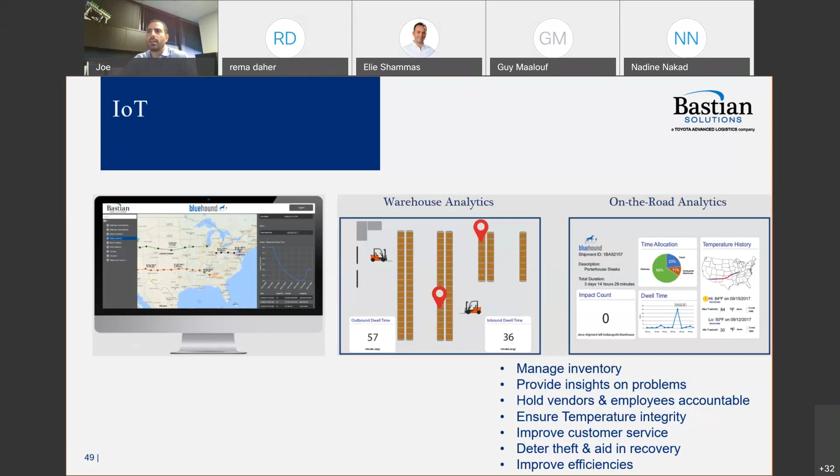Internet of Things, or IoT - this is something we were involved with to do asset tracking. If you've got a pallet in a warehouse, you can track it real time where it is. You can also track it if it's being transported across the nation. You can keep track of temperature variation, especially for food items, or if it's a fragile item, you can have inertia sensors and force sensors detect if it got hit one way or the other along the way. It can also deter theft and aid in recovery. Overall, it's helping improve efficiencies across warehouses.

And the last one is 5G networks. The only thing I'll bring up here is the quality of service you get out of 5G. It enables mobility in a warehouse for AGVs and AMRs. You can have better transition and handoff between access points, so you don't get dropped connections, and you can also have a better feed from cameras that way. There are other benefits to 5G networks, but I'll keep it to that for today.

Let's talk about the challenges we face when we go into an existing facility that already has some sort of automation, but also has different kinds of infrastructure already there. The first one would be localization and navigation, but these are forever changing spaces. You get people walking around, other robots walking around, and pallets being dropped randomly in the aisle where the robot needs to drive and navigate.

Some types of navigation systems rely on natural features or fiducials, so those may be covered, and that poses another challenge for the mobile platforms to localize and navigate. So you see a lot of companies and startups working in this field. Some of them use AI and vision to navigate. Some look up at the ceiling and memorize it, others look down at the floor and memorize it to navigate.

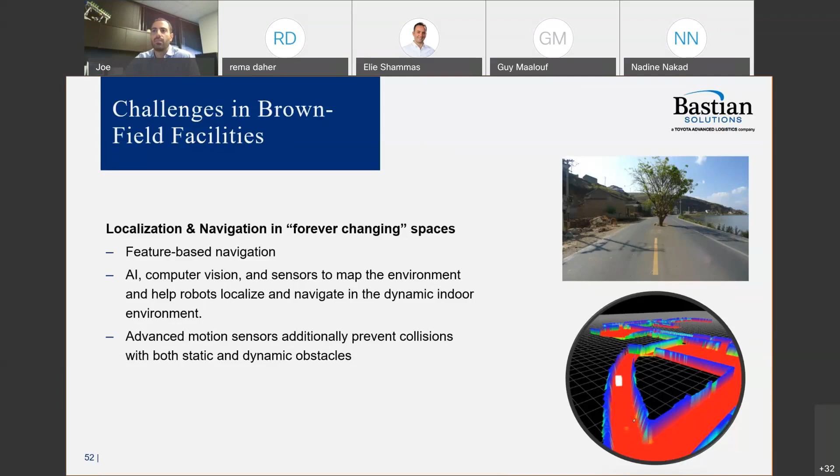But really, with the advancement in motion sensors, you can prevent collisions. So we employ safety scanners, safety-rated components to prevent collisions, whether with static or dynamic obstacles. That's another layer of safety that mobile platforms have to use in warehouse automation.

Another challenge is that a lot of products are not designed for automation. They're designed for us, for people, whether it's designed for us to easily pick it up and place it somewhere, or it's designed for our eye, so it's appealing to the eye. That's with the decals and the shape of it, but they're never made for robots.

And that poses always a challenge for us, especially with a pallet like this. If you were to create it with a robot in mind, that's a nightmare for any roboticist. But at the end of the day, these are challenges that we have to solve and work with.

But then you also have not only the product, but the setup as well and the work environment. For example, with the Ultra Robot, you get trucks of different sizes, different shapes, different types. Some of them have walls destroyed, and you've got to deal with it. You don't have a choice.

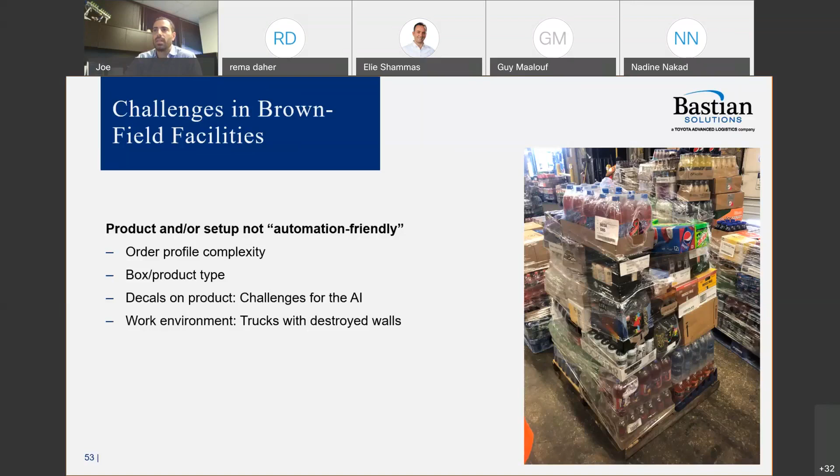So those are some of the major challenges that we see, and you've got to try to think through all of these different scenarios that you're in. At the end of the day, you've got to go put a robot in the field, test it, and learn from it.

Another challenge we see is people. Well, safety. You've got robots working next to people, collaborative environments. You also have people not following the standard operating procedures.

We've come close before, for example with the Ultra robot, where the truck driver just decided to leave and take the truck with him while the robot was inside. Luckily we'd thought about it beforehand and had ways to prevent that from happening. But these are the problems you see mostly with people not being familiar with the technology, or not necessarily following the standard operating procedures.

Obviously you have to follow safety standards. Sometimes you create new types of robots and technology that don't have safety standards, or the standards are so old they're outdated. What do you do there? Well, you jump in and help create these standards.

You also have people that are afraid of these robots. They think the robots are going to take over their jobs. We see that, we see people sabotaging the robots, covering up the cameras, moving the cameras.

And what we end up doing always is train and get those people to re-specialize and retrain, so they're working in a safer, friendlier environment, and they can work for a very long time in that setup.

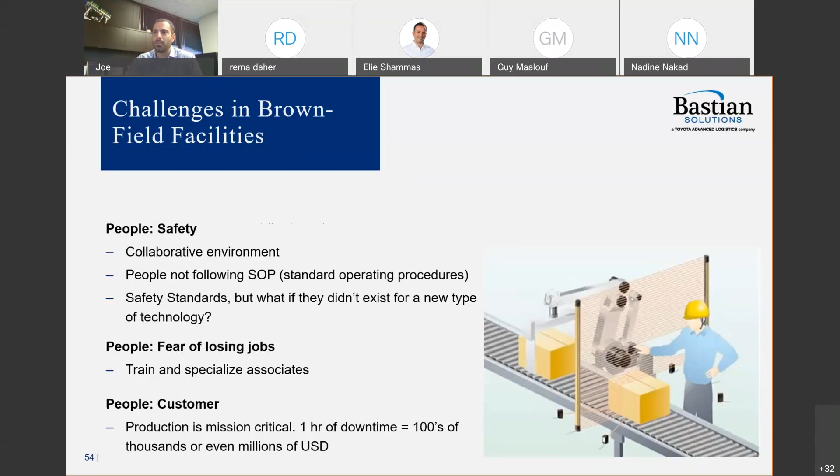One of the setups we've done, if you have a 1 hour downtime on a line, that is equivalent to hundreds of thousands of dollars, if not even millions, in operation. So you've got to think about that. You've got to think about how the customer is thinking, and work with them as much as possible.

Finally, to give you a piece of advice, I always tell my team: do it right the first time, don't cut corners. There's a good saying here: if you don't have time to do it right, when will you have time to do it over? By John Wooden. Really, if you cut corners, you're going to have to come back to fix it, whether it's homework, a project, a senior project, a robot for a customer, or building a country. I'm not sending any political messages here, but whatever you do in life, try to do it right from the first time. Put your energy and effort into it, and it'll come to fruition.

I listened to a seminar over 10 years ago. It was a very boring seminar, and I don't remember anything out of it except at the end the presenter said: hire A players. A players hire A players, B players hire C players so they make themselves look good. So you guys better be A players—I know you are. And when you go into the industry, whatever you're doing, make sure you create a good culture, treat your employees the way you want to be treated, but at the same time look for the A players, because they will propel the company, or propel the work, to another level.